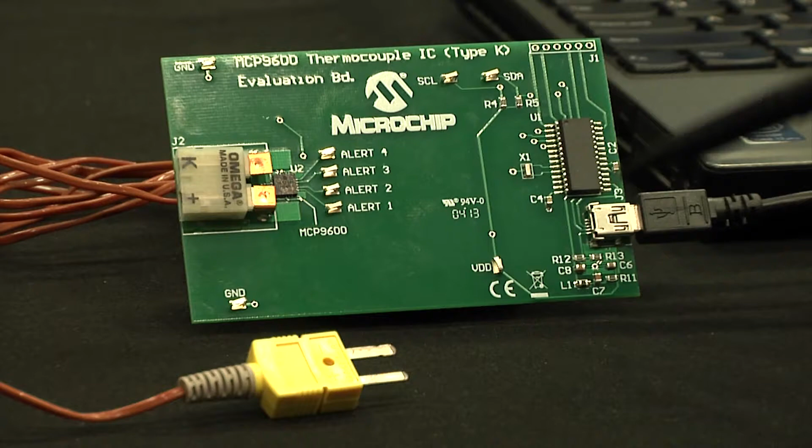Can we take a closer look? Absolutely. So this is the MCP9600 demo board. You can see the MCP9600 right here. It's in a 5x5 QFN package. One thing to note is that there's no passive components. Really the only thing on the board is the microcontroller and the 9600, and then you have a connector for the thermocouple. The board comes with a K-type thermocouple, so I'm going to go ahead and plug that in.

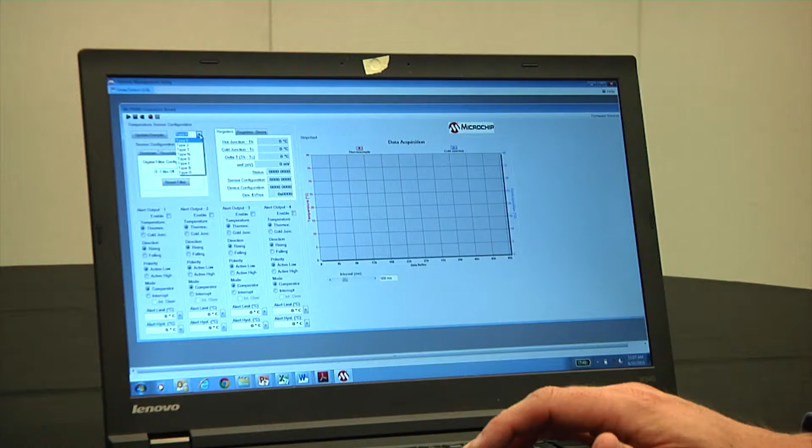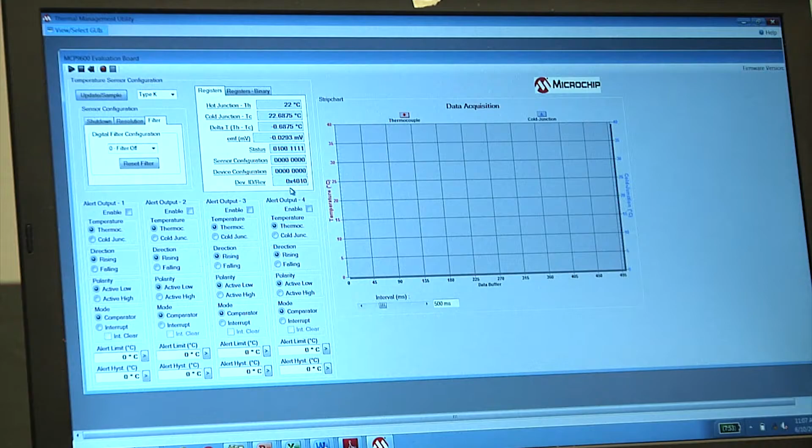And then if you look on the GUI, right here is where you would select the thermocouple type. K is selected, but it has all the other options available. If I want to do just a single update, I can click the Update Sample button, and it gives me a temperature reading over here in the registers. You can see the hot junction temperature, which would be the thermocouple. You can see the cold junction temperature, which would be the integrated temp sensor on the device. And then it gives you the hot junction minus the cold junction, so the delta between the two. And it also gives you the measured value of the thermocouple in millivolts.

The rest of the registers, like the status register, the sensor configuration, and the device configuration, relate to the different features that you can set up in the GUI. For the demo, I'm not really going to go through those. But things to note is that you can set up the shutdown modes in here. We talked about that during the presentation. You can set the resolution for both the hot junction and the cold junction, as those are programmable. And you can also set up the filter under this tab.

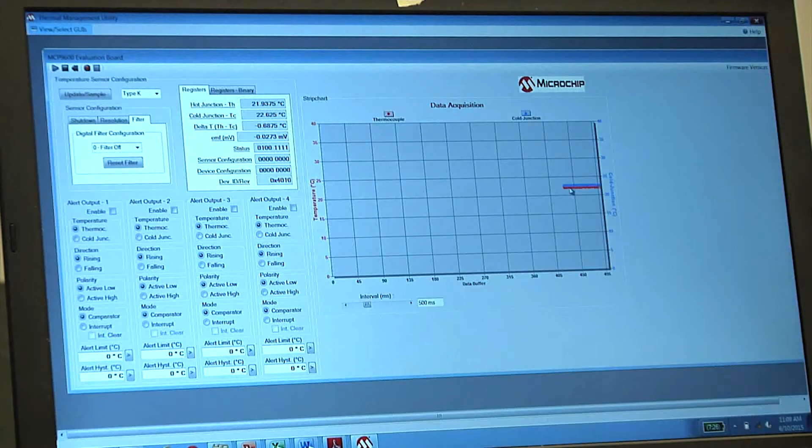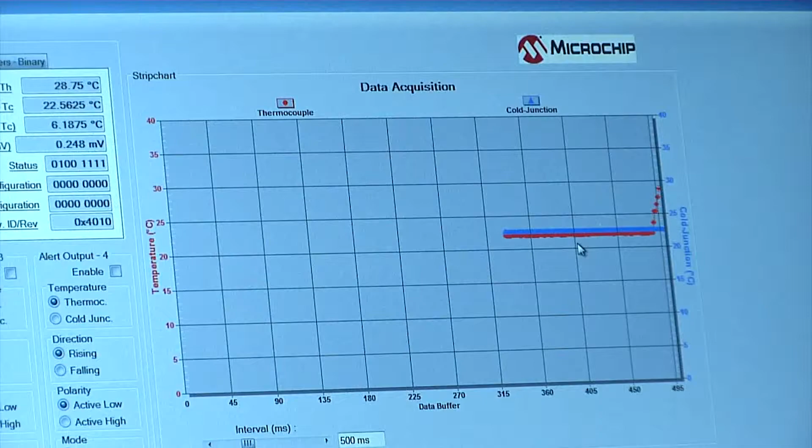Up here in the upper left, there is a button that will allow the part to data log the temperature readings for both the hot and the cold junction. The hot is the red, and the cold junction is the blue, so the thermocouple is the red, and the internal temp sensor is the blue. So if I add heat to the thermocouple, you can see the temperature rising. And if I let it go, it should go back down. Excellent.

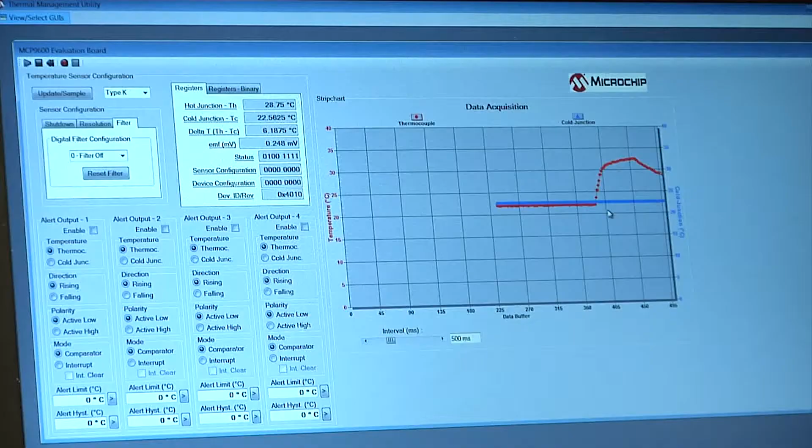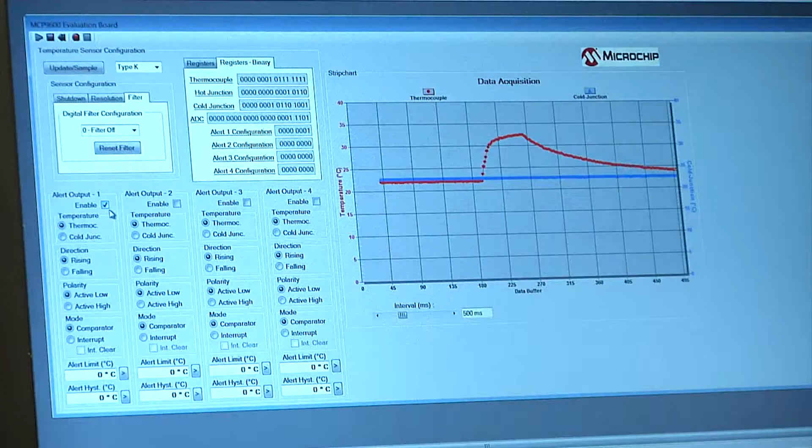Down here in the bottom, you have all the features that we discussed as far as the alert limits and things like that. If I click on the binary register, I'll do alert 1 so you can see the change. If you look at alert 1, it's all zeros. If I enable, it turns it to 1. So I can enable all the different alert features. I can set the thermocouple or the cold junction as the reference temperature.

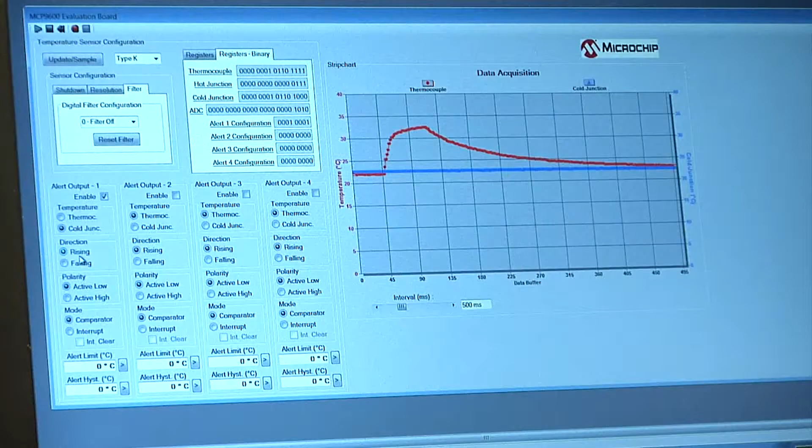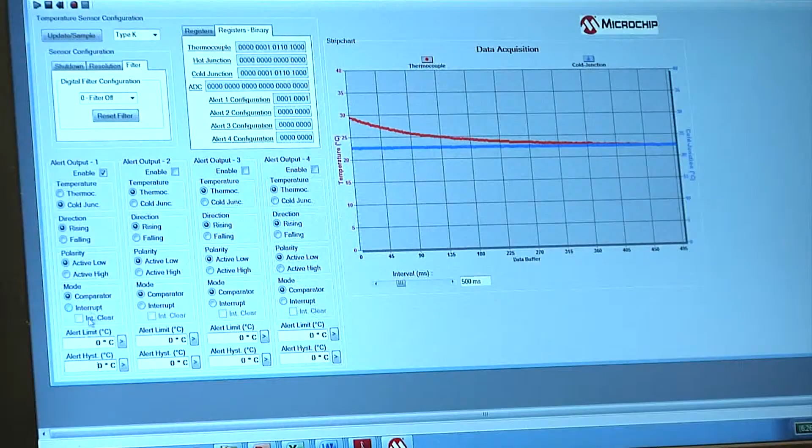And I can change between the rising and the falling edge. The rising edge corresponds to an over temperature condition, the falling edge an under temperature condition. I can change the polarity from active high to active low, I can change it from a comparator to an interrupt, and then I can set my limits and my temperature hysteresis down here on the bottom. And so that is basically the thermocouple demo board.